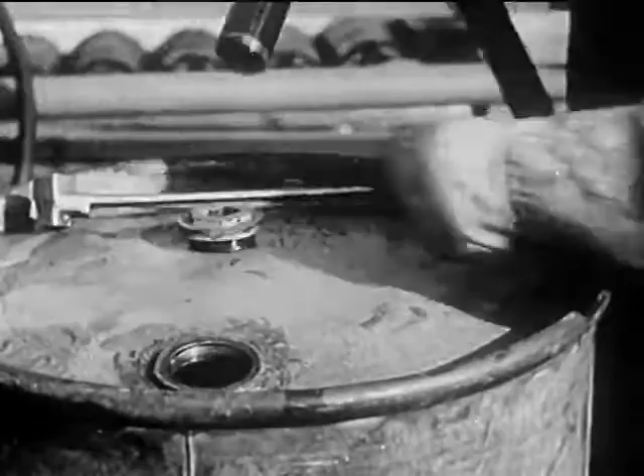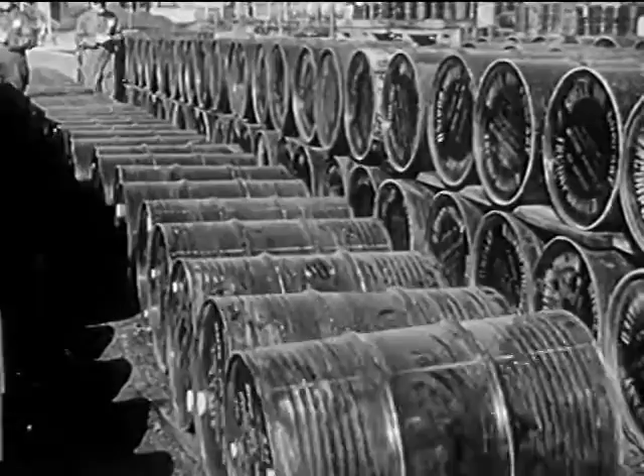Gasoline. Powerful stuff. Modern magic. Our lives, our business, our cities are patterned on motor transportation which gasoline has made possible.

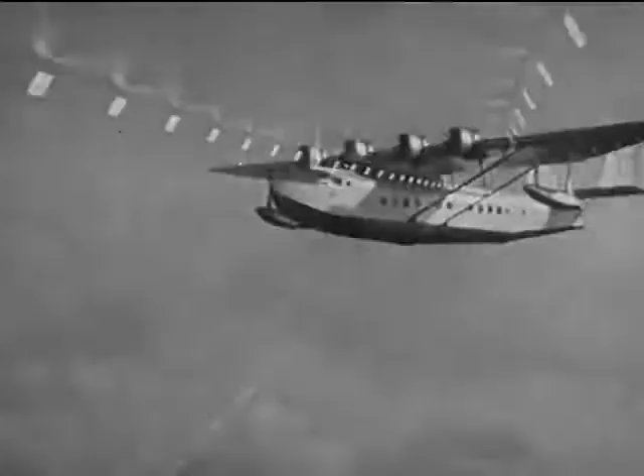Do you realize what gasoline means to this country? It has added a new freedom to our lives, the freedom of movement, of individual transportation, anywhere, anytime, for everybody in America.

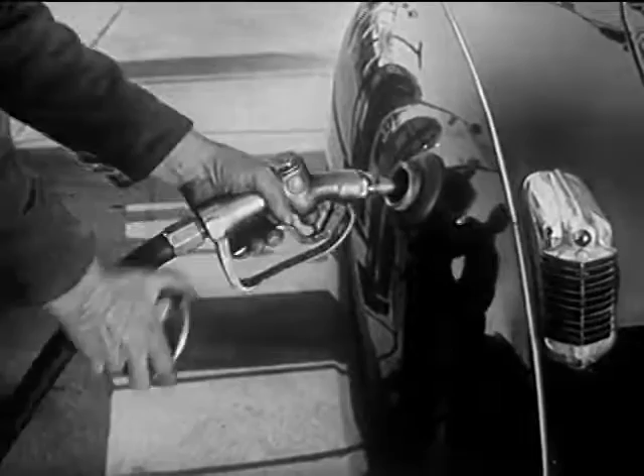And those who make and sell gasoline perform a service, not only to their communities, but to the whole country. But most people just don't realize how much hard work, knowledge, and money it takes before gasoline can come out of a pump and into the tank of an automobile.

First, there is the search to find the crude oil that's needed to make gasoline, and that takes plenty of study and special training. They send out crews to make surveys of territories that seem promising, just like prospecting for gold in the old days. Only these men are scientists.

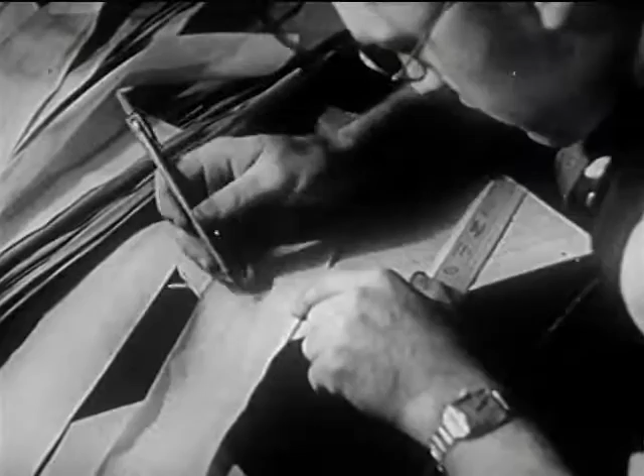They sink test holes and use super-sensitive instruments to find out what the Earth is like far below the surface. If the experts decide the results show the possibility of oil, they are ready for the next step.

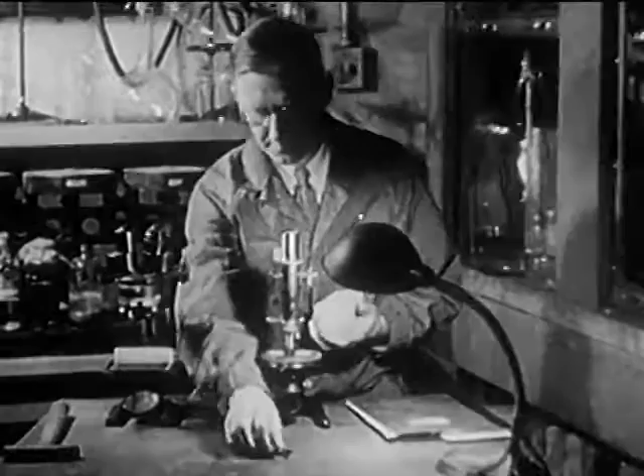Usually, they first drill a hole to get actual samples of the Earth itself, cores that show exactly what the Earth is like at different levels. The oil engineers can tell if these samples come from a place that contains crude oil, how good it is, and how much there is.

Then another big, tough, expensive job gets underway. Clearing the land for drilling, maybe even building roads through wild, rough country. Oil drilling goes on all the time.

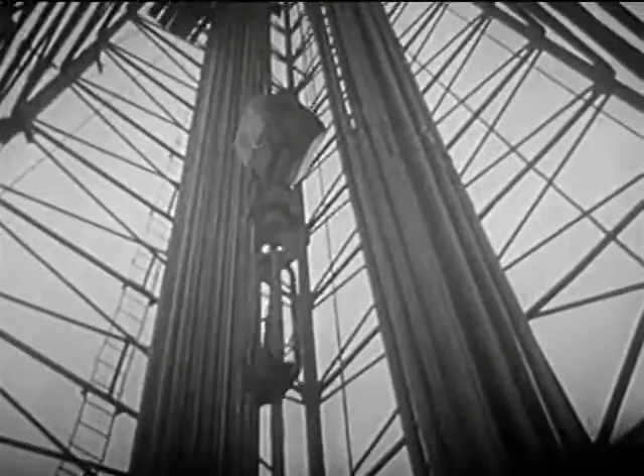Thousands of new wells are drilled every year. And because of the scientific way they go about it today, over half of these new wells deliver oil.

Next, there's the job of getting this crude oil from the wells to the refineries. A lot of it travels through pipes, thousands of miles of pipes. Some pipelines extend halfway across the country.

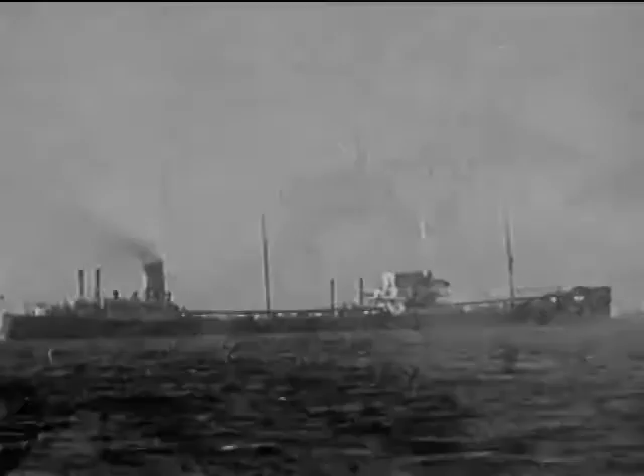And plenty of crude oil is carried in tankers. They also transport finished gasoline to every part of the world. These tankers form one of the biggest merchant fleets we have.

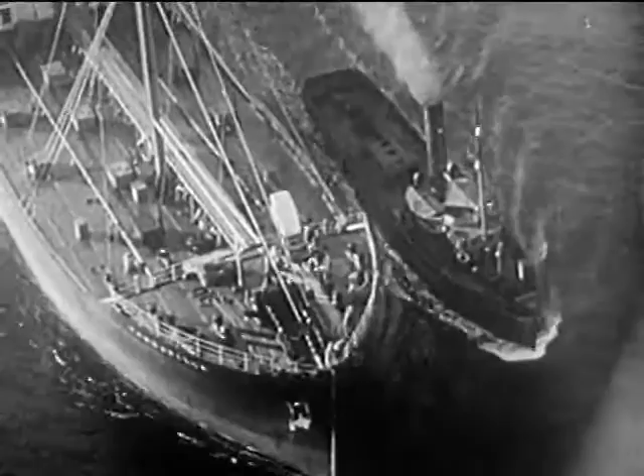And the railroads. They carry oil from the gathering tanks to the refineries, and then gasoline from the refineries to distribution points all over America.

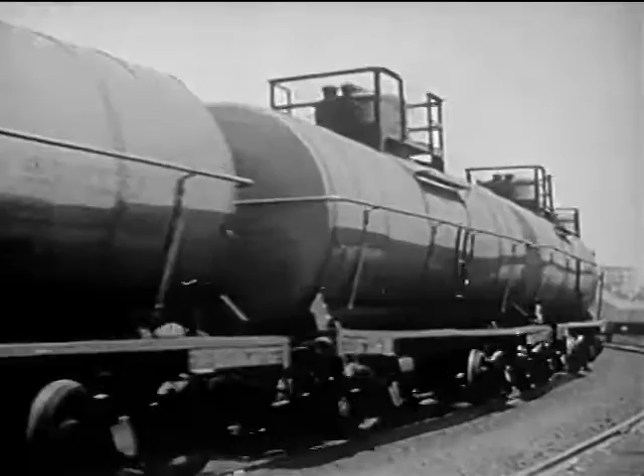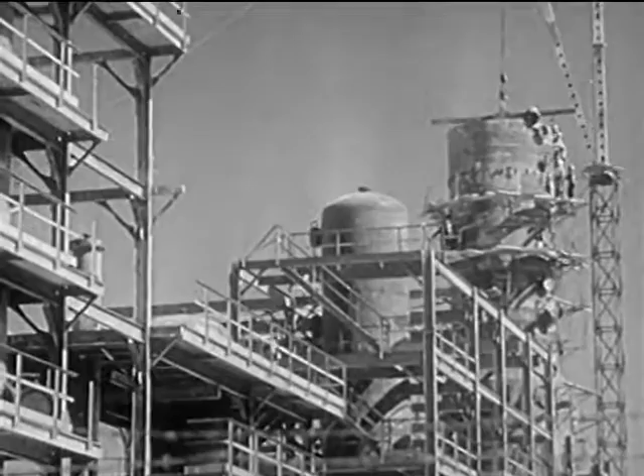The process of refining crude oil into gasoline and other products is another big part of a big industry. It takes millions and millions of dollars worth of equipment to turn out finished petroleum products.

It's a complicated process, but not at all difficult to understand when you realize that every drop of crude oil is a mixture of many small particles or molecules. They're called hydrocarbons because they are compounds containing only hydrogen and carbon. The molecules vary in relative size and weight.

The large, heavy molecules are found in the heavier oils, the fuel oils, lubricating oils, tar, asphalt, and so on. In what you might call the medium sizes, you find smaller and lighter molecules, and these are what are used for gasoline and kerosene and similar products. The very small and very light molecules are the natural gases.

As it comes from the well, the crude oil contains molecules of all sizes. The first step is to separate them.

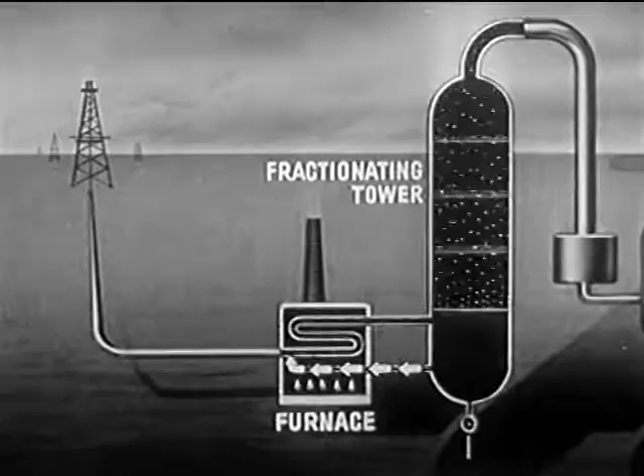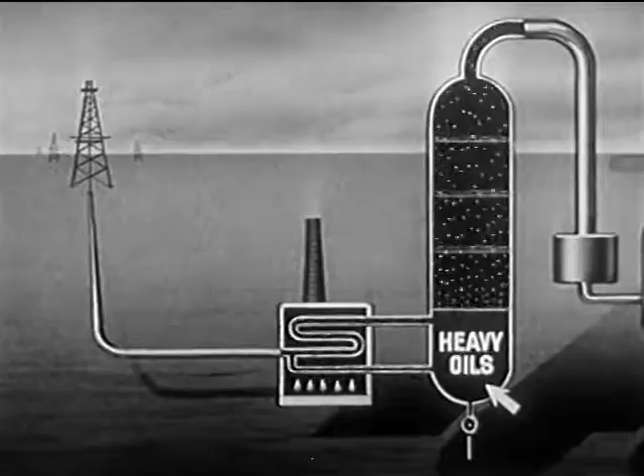The crude oil is heated in a furnace, and the hot oil is pumped into a fractionating tower. The proper temperature is maintained in the tower by recirculating part of the oil through the furnace. The heavy molecules in liquid form concentrate at the bottom of the tower and are drawn off for use as heavy oils. The lighter molecules vaporize, and with the natural gases, move to the top of the column.

This mixture of gases and oil vapors flows into a condenser. The vapors condense into liquid gasoline. The next step is to separate the gases from the gasoline.

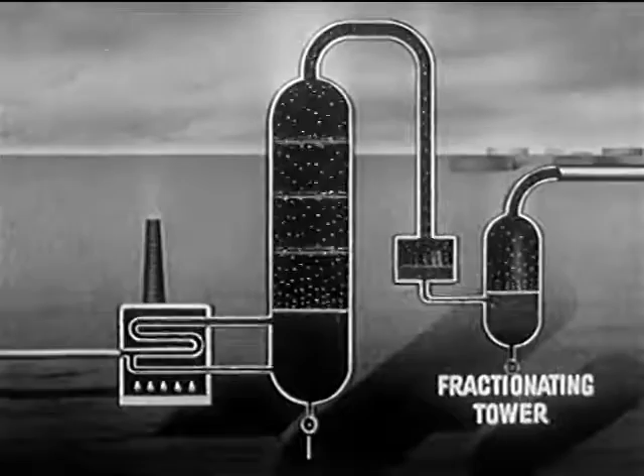This is done in a second fractionating tower. The gases move to the top of the tower and are drawn off. The liquid gasoline concentrates at the bottom of the tower. This is what we call straight-run gasoline.

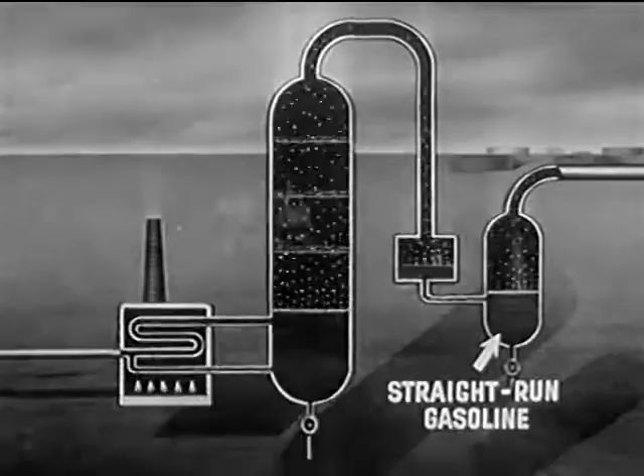In the early days of the automobile, this straight run was the only kind of gasoline we had. But as public demand increased, new ways had to be found to get more gasoline from a given amount of crude oil. So the oil industry developed what is called the thermal cracking process.

Certain of the larger molecules of heavy oil are literally cracked into smaller molecules in or near the gasoline range. In the fractionating tower, the oil molecules tend to collect at various levels according to their size. That's why they call it a fractionating tower.

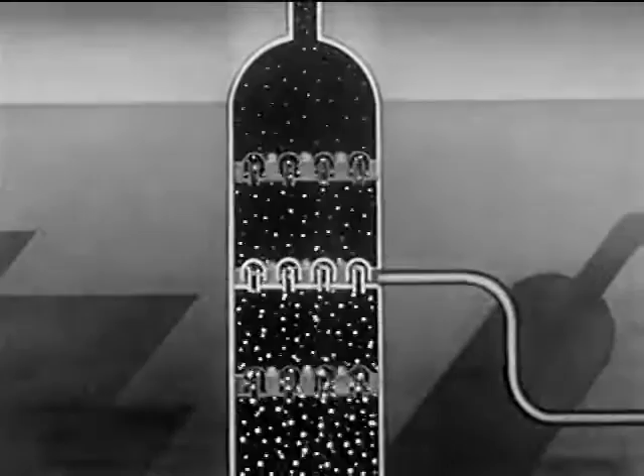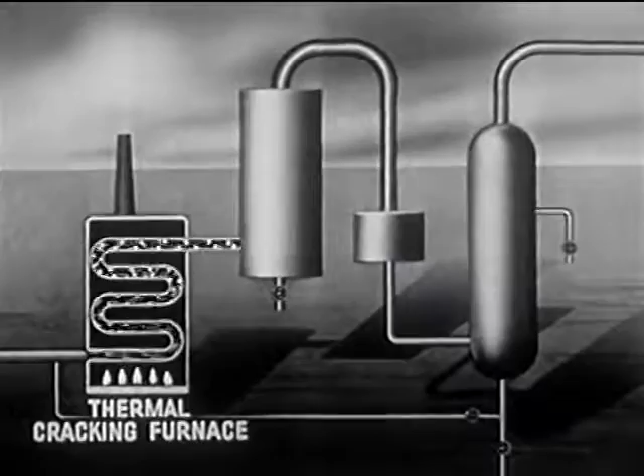The molecules collect in groups or fractions. This makes it easy to take off the group of medium weight molecules that are best suited for use as cracking stock. These molecules are piped to a thermal cracking furnace, where by heat and pressure, they are cracked into smaller molecules.

At the same time, a lot of other things happen to the chemical structure of the molecules, and a kind of synthetic crude oil results, with molecules of all sizes, but almost half of them are in the gasoline range.

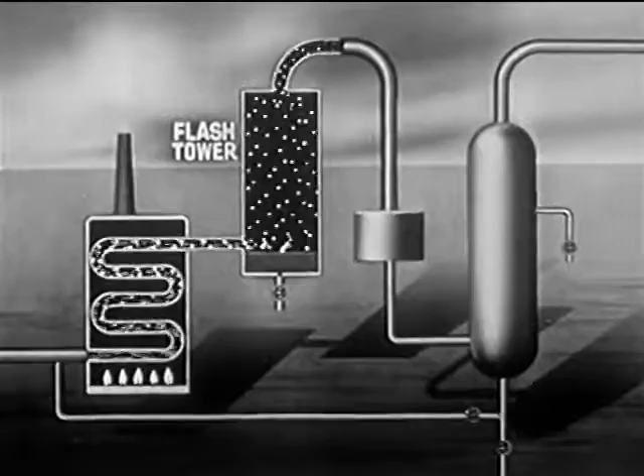This goes into a flash tower where the smaller molecules vaporize. Those that are too heavy are drawn off and used as asphalt, coke, tar, and so on. The lighter molecules move to the top of the tower and then to a condenser where they again become liquid.

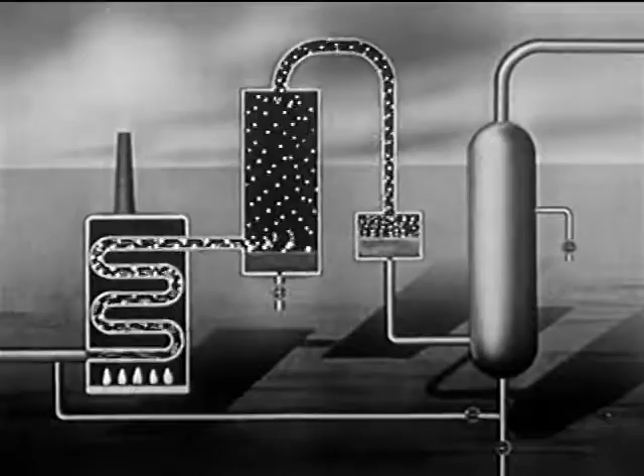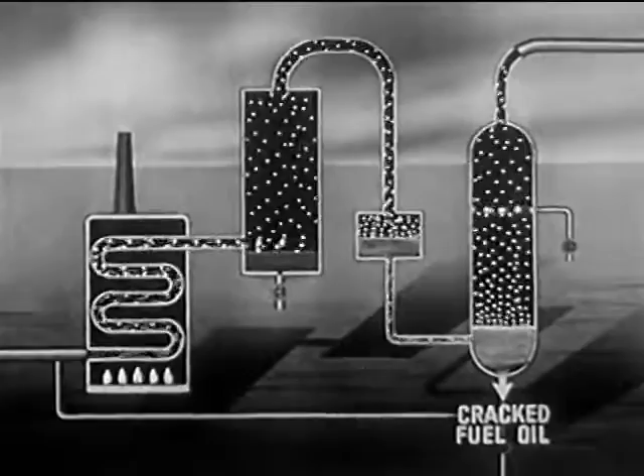To separate them, they go to another fractionating tower. The heavier oil collects at the bottom and is drawn off as cracked fuel oil. The lighter molecules move toward the top, condense, and are taken off at their proper level as thermally cracked gasoline. The gases formed during the cracking process move to the extreme top of the tower and are piped off.

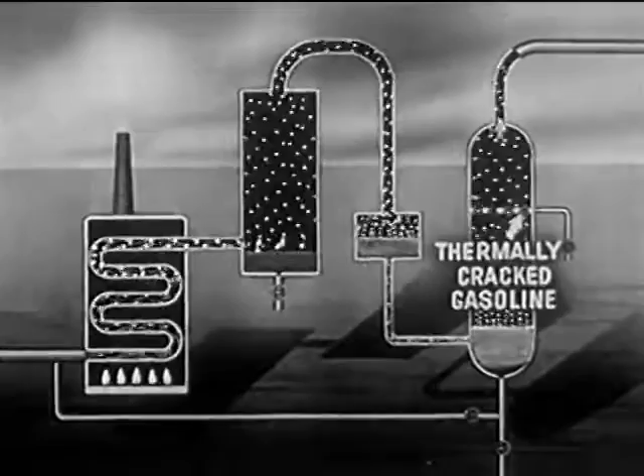Also, to obtain more gasoline, some of the cracked fuel oil is piped back to the thermal cracking furnace and goes through a second cracking process, again increasing the amount of gasoline obtained from a given quantity of crude oil.

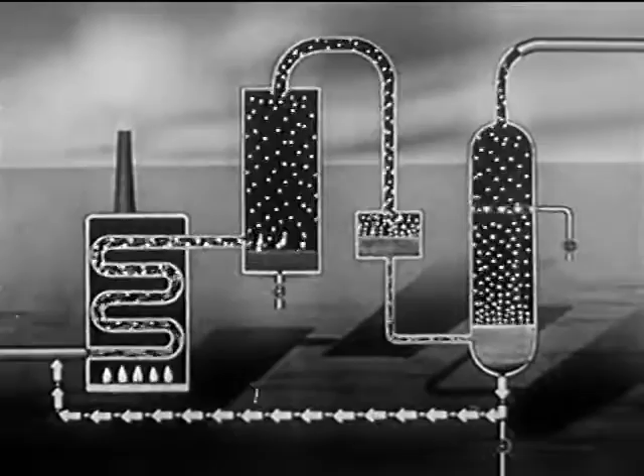In recent years, the industry has tremendously expanded a comparatively new cracking process called catalytic cracking. A catalyst is a substance which causes a desired reaction to take place without being affected itself. In cracking gasoline, the catalyst is in the form of beads or a fine powder-like material.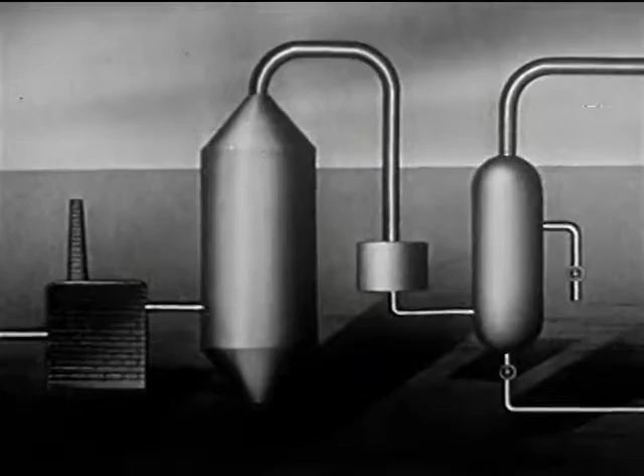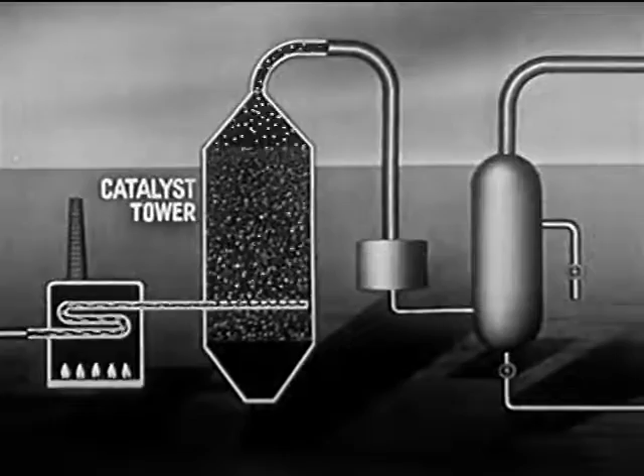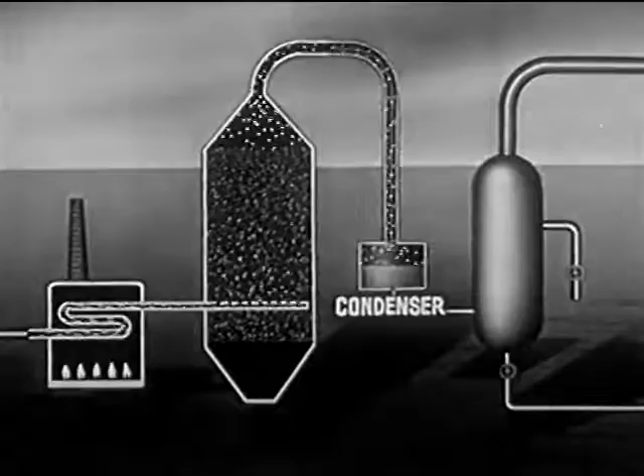In this process, heavier molecules of oil below the gasoline range are piped into a furnace and heated. The hot oil vapors then go into the catalyst tower, where they contact the catalyst. This not only cracks the molecules down to smaller size, but changes their chemical structure to make them suitable for gasoline. These smaller molecules then go to a condenser, where they become liquid, and then to a fractionating tower.

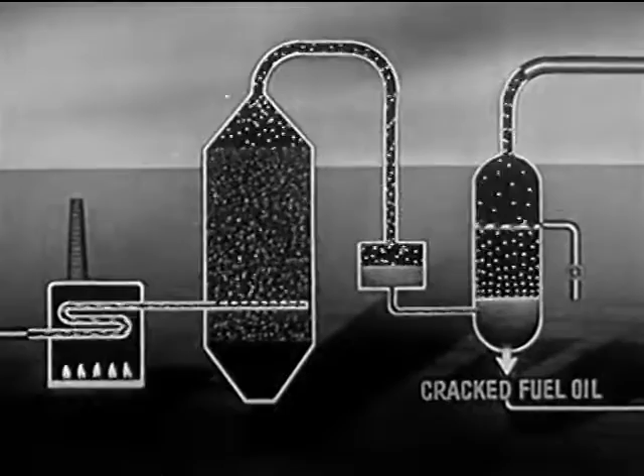Again, the liquid that is too heavy for gasoline collects at the bottom and is drawn off as cracked fuel oil. Gasoline is drawn off at its proper level, and this is what we call catalytically cracked gasoline.

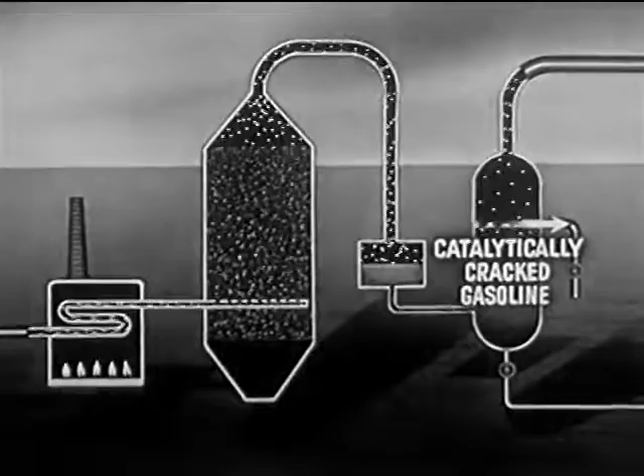In many operations, even more gasoline is obtained by sending some of the catalytically cracked fuel oil into the thermal cracking process. The gases, as usual, collect at the top and are piped off.

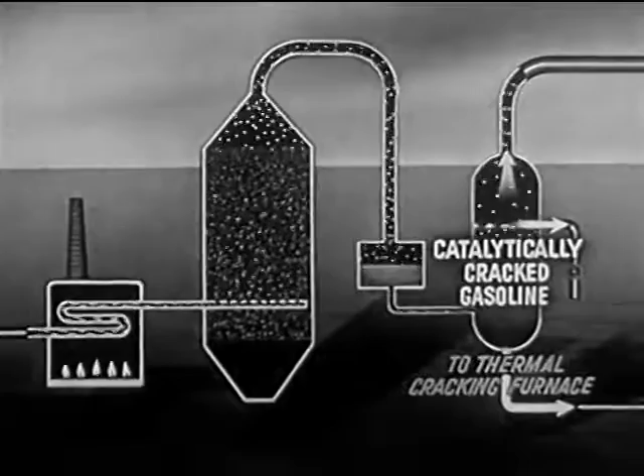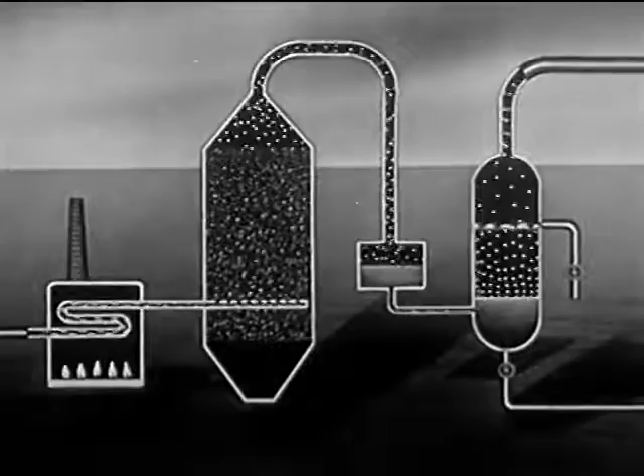In every process, gases have been produced. These used to be burned away as waste or used as fuel. But to conserve our natural resources and to obtain the largest possible amount of gasoline from the crude oil, the oil industry discovered how to make gasoline from some of these gases too, by a process of polymerization. This is just the reverse of cracking.

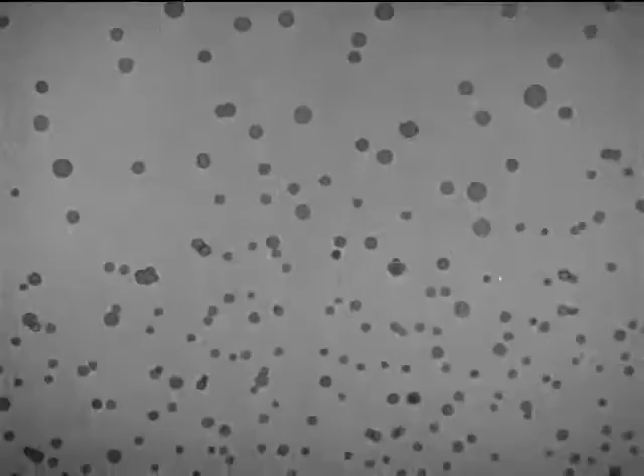Polymerization simply means combining very small molecules to form larger molecules. So the smaller molecules that are lighter than gasoline are combined into larger molecules from which gasoline can be made.

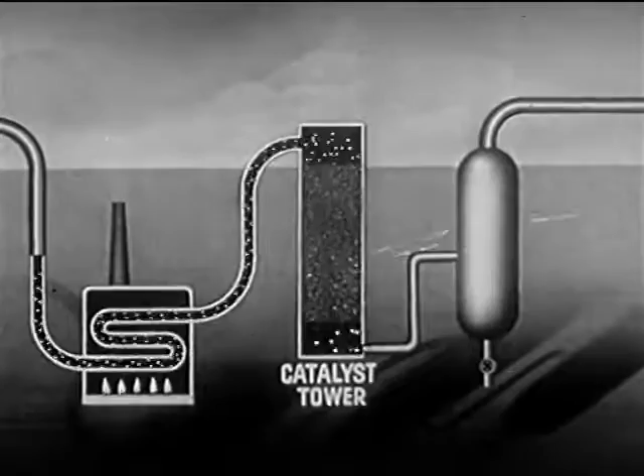The gas is piped into a furnace and heated. The hot gas goes to a catalyst tower. By contact with a suitable catalyst, usually phosphoric acid, a chemical reaction occurs which causes the molecules to unite and form larger molecules. These larger molecules go into a fractionating tower.

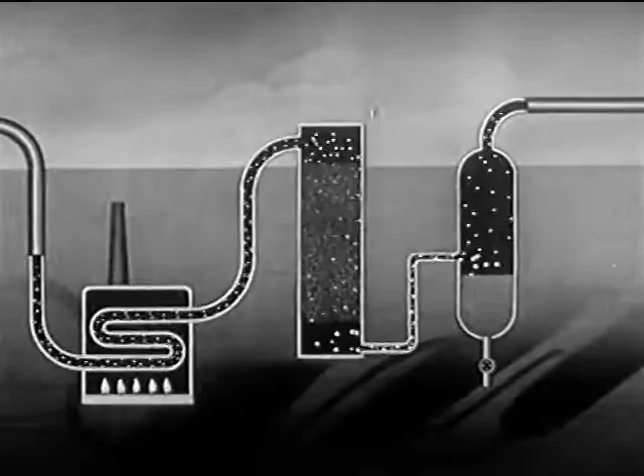Those in the gasoline range condense to liquid, and this is drawn off as polymer gasoline. Those that are still too light are drawn off the top as fuel gas.

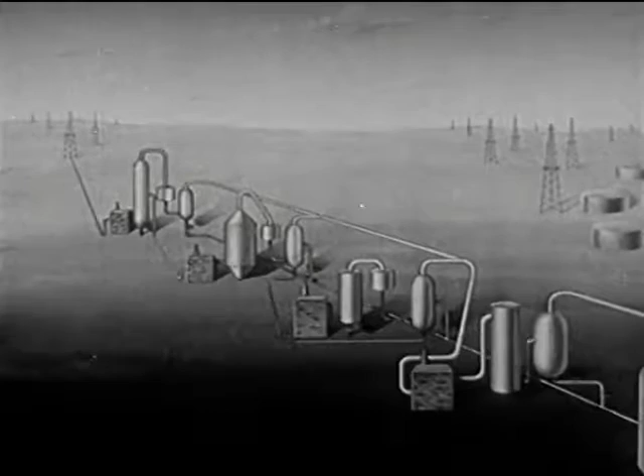So we have four main types of gasoline refining processes. Straight run, in which gasoline is vaporized from crude oil by simple heating. Thermal cracking,

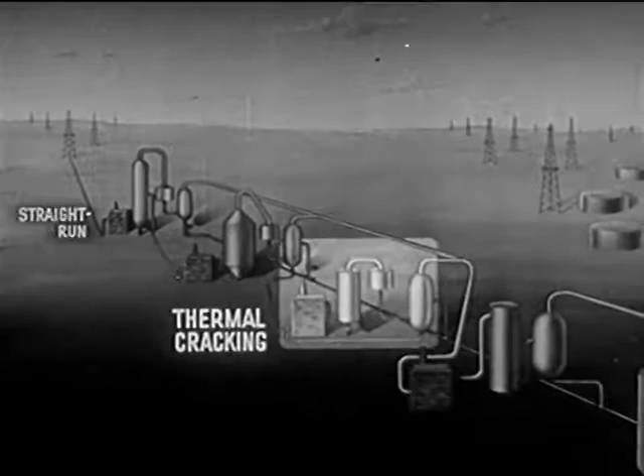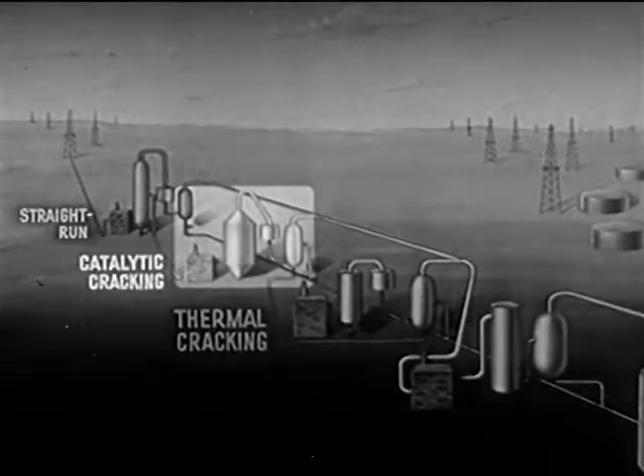in which heat and pressure are used to split heavy oil molecules into smaller molecules suitable for gasoline, catalytic cracking, in which a catalyst is used to split heavier oil molecules, and the polymer process, in which small gas molecules are combined to form larger molecules and condensed to liquid.

Certain of these processes produce gasolines of superior anti-knock quality. Gasolines from other processes can be stepped up by blending with materials such as alkylate or benzol. Most refiners, however, find it advantageous to add Ethyl brand of anti-knock compound to their gasolines. It ensures high anti-knock quality for their entire output.

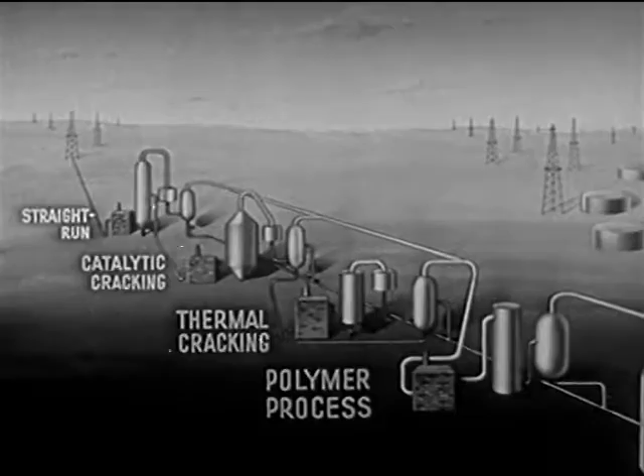For more than 20 years, Ethyl brand of anti-knock compound has helped the petroleum industry to bring out better and better gasoline. And during these past years, you have seen what better gasoline has meant in producing better automobiles with engines that give increasingly better power and better performance.

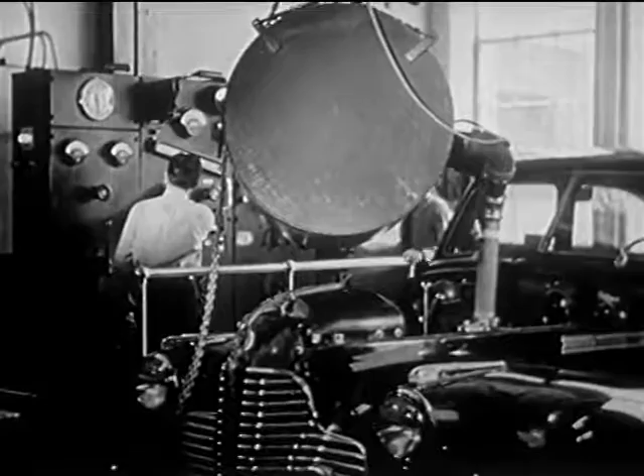This progress is the result of the constant endeavor of the oil and automotive companies to fit engines to fuels and fuels to engines, an endeavor in which Ethyl research engineers, today as in years past, are working in close cooperation with both industries.

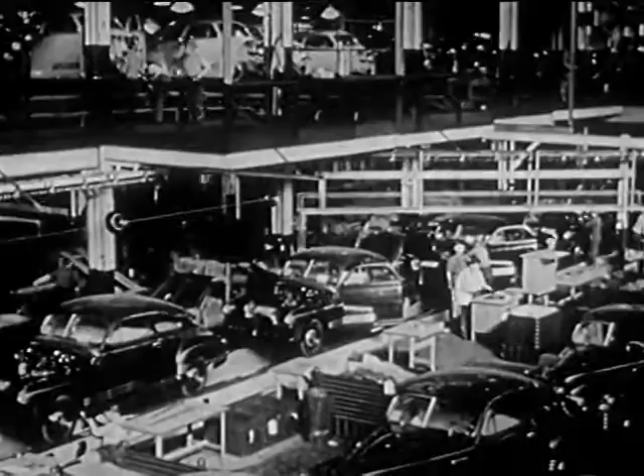And as our progressive American oil industry, with research and ingenuity, continues to improve gasoline, automotive engineers will design new and better engines capable of converting this extra available power into greater efficiency, more economy, faster, smoother, more resilient power on the highway, on the farm, in the air, and on the water.

For this is the age of motor transportation, with gasoline for everybody.